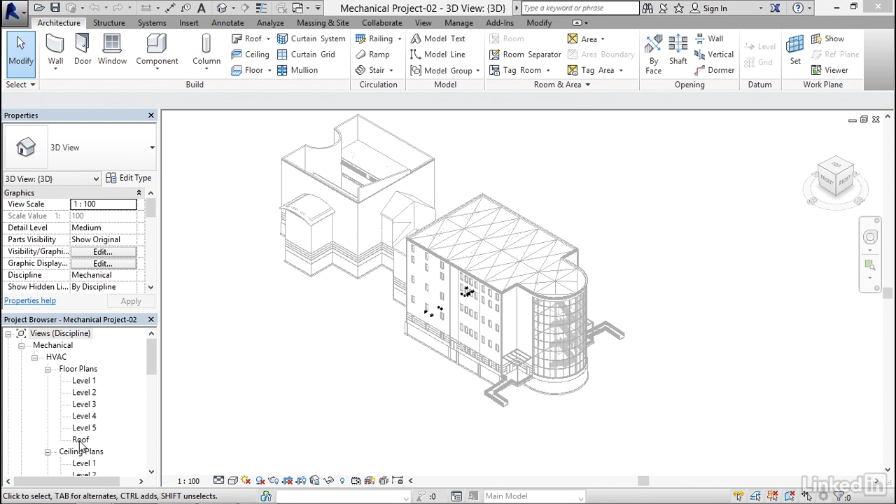of my building. In my project browser, I'm going to go to my roof level. Now what I want to do is I'm going to zoom in over here. I think I want it over in this neighborhood. I'm going to go to Systems. I'm going to go to Mechanical Equipment. Now I know I don't have one of these big boys in here, so I'm going to click on Load Family.

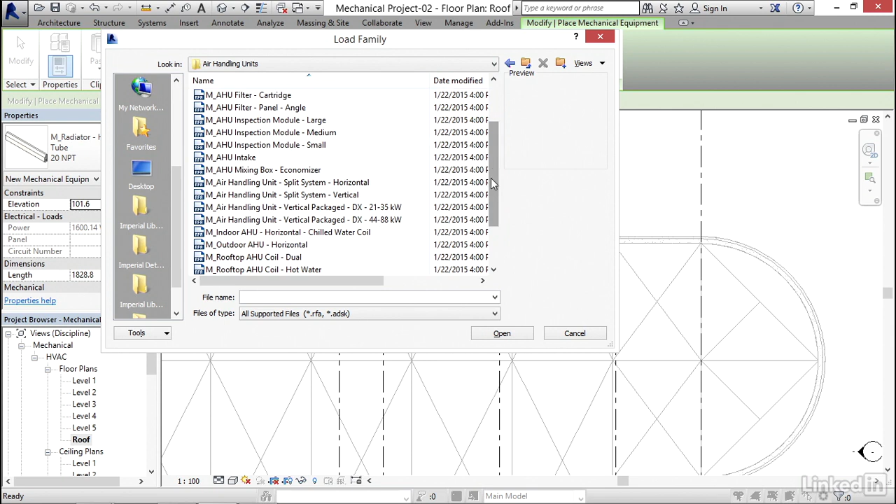I'm going to scroll down to Mechanical, MEP for sure. I want to go to Airside Components. I want to go to AHUs, Air Handling Units. And I want to scroll down till we get to M, Outdoor, AHU, Horizontal. That's my favorite. I want to click on Open.

Now I'm going to put it right about here. I'm going to hit Escape a few times. Now I'm going to select this unit. Generally, this will be up on some kind of curbing. What I'm going to do is I'm just going to give it an offset. I'm going to go around 305. Enter. 305 millimeters or 1 foot. I'm going to give it a little bit of an offset. Okay, we've got this in here.

Now I want to go down to my ceiling plan level 1. I like to hit my ceiling plan when I'm putting in my VAVs, just because I like to see where there's a hard ceiling or where there's a suspended ceiling. Generally, you want to put it somewhere where you can access it without having to cut a hole through some gypsum. So what I'm going to do is, now that I'm down here, I'm going to go to Mechanical Equipment.

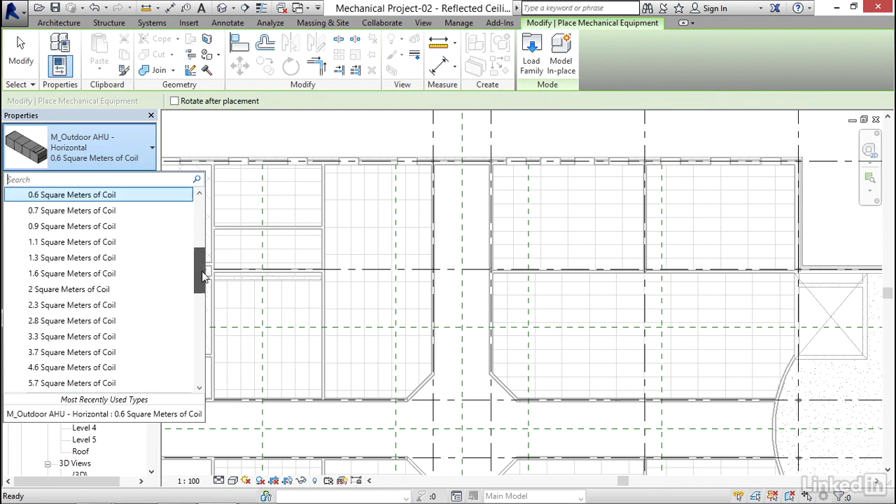I'm going to click my drop down here. And I know we've got a couple VAVs in here that I would use. So I'm going to scroll down and I'm going to grab my 300 millimeter inlet. Now my offset, I'm going to type 3048 and hit enter. Now I'm going to put that up in here somewhere. I'm going to hit my space bar.

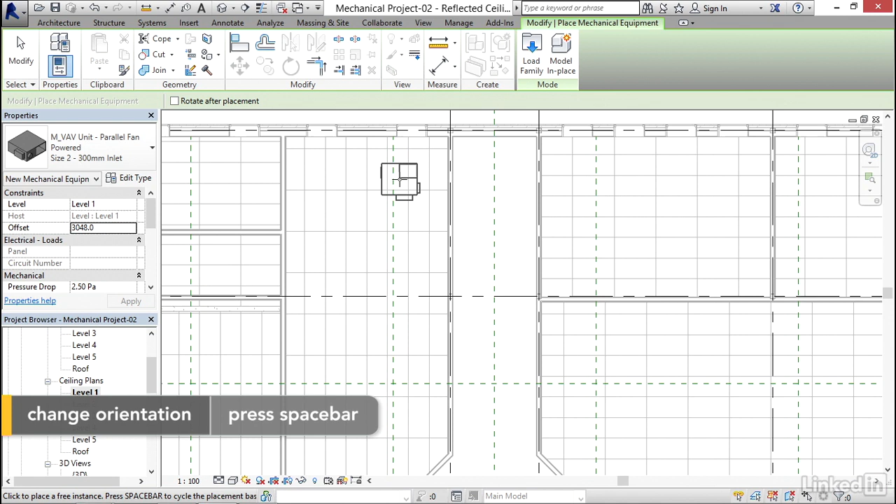Notice that I can rotate it. I'm going to rotate it into this orientation right here. Not that it really matters, but this is where I want it. So I'm going to put it right here. I'm going to hit Escape. I've got air coming in, got air coming out, and we've got Return. I'm going to hit Escape.

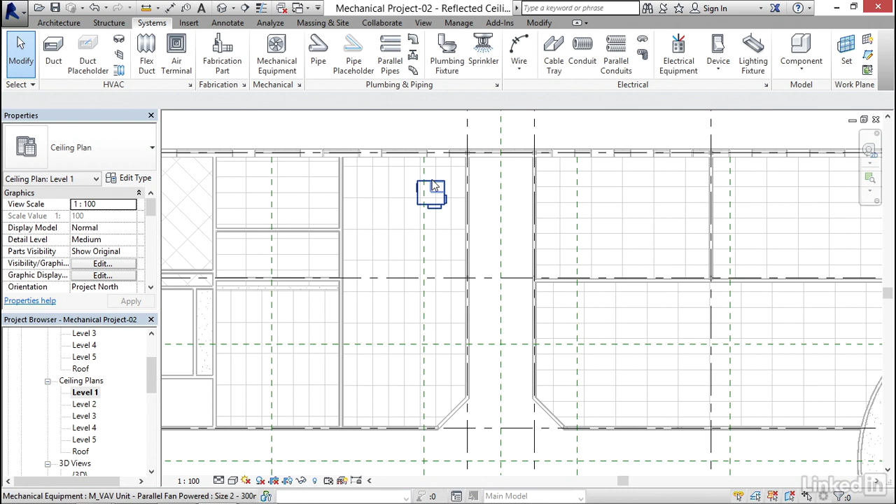I'm going to select it. I'm going to scroll down here. I'm just going to look at some of my parameters. I'm going to come down to Mark. Instead of 1, I'm going to call it VAV-1. I'm going to click Apply. I'm going to select VAV-1. I'm going to click Copy. I'll make 1 copy for now.

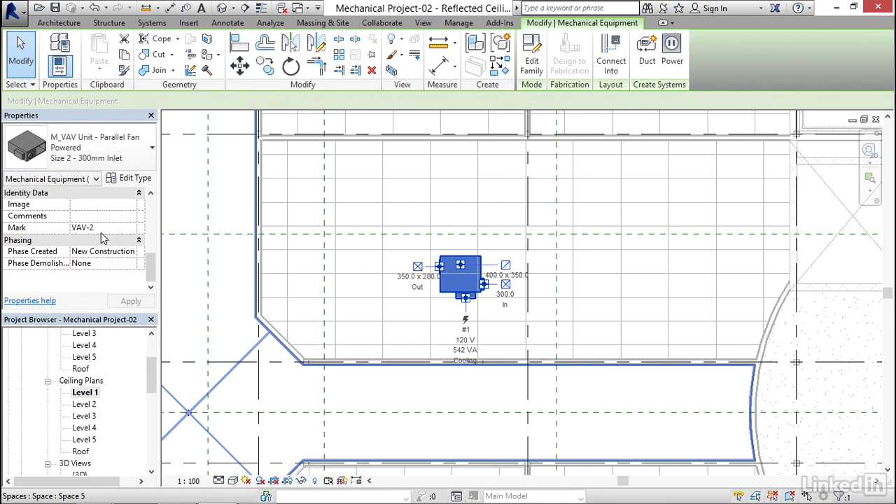So I'm just going to pick an endpoint down here. And maybe I want another system down here somewhere. So I'm going to pick a point here. But notice the mark, VAV-2. Pretty cool. This is going to come in handy when we start tagging stuff. I'm going to hit Escape a few times.

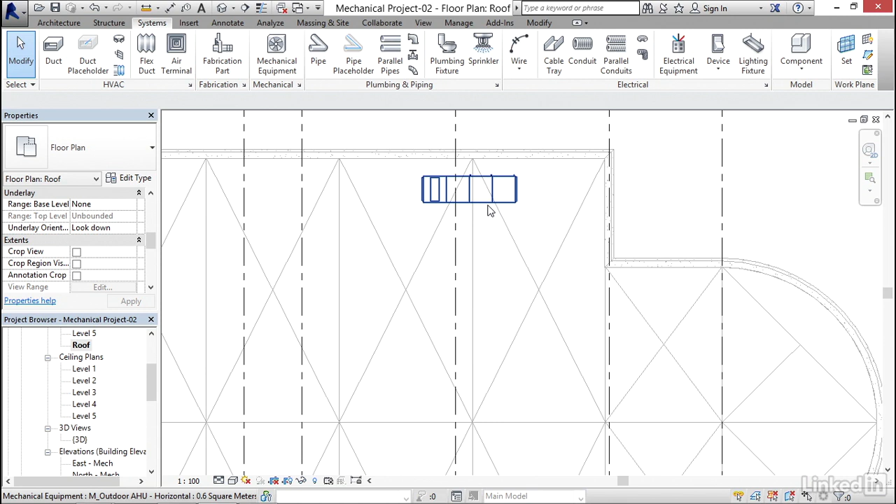I'm going to go back up to my roof level. But make sure you're going to your roof level floor plan, not roof level ceiling plan. As a matter of fact, I'm going to right click on roof ceiling and I'm going to click Delete. We don't need that anymore. So I'm going to double click on roof. I'm going to select my AHU. My mark is going to be AHU-1. Now I'm going to click Apply. I'm going to hit Escape a few times.

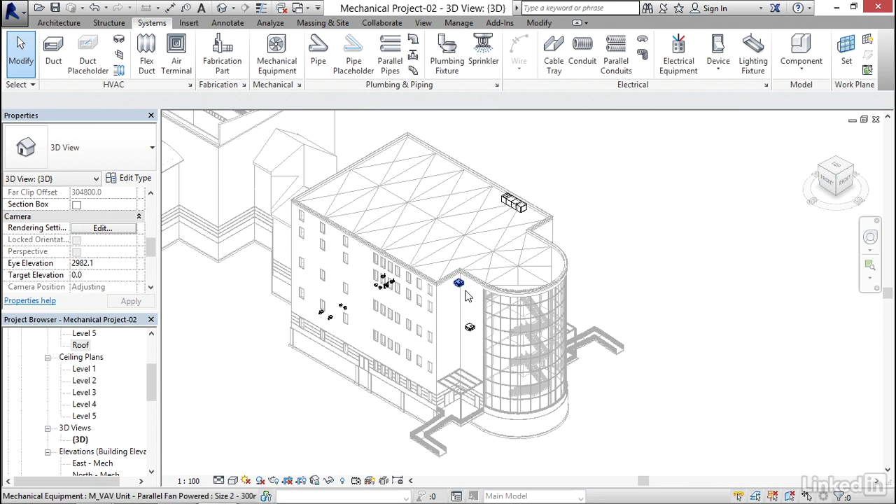I'm going to go to a 3D view. And it's not much, but we've got a good start. Know that we can copy these VAVs around anywhere we want. As a matter of fact, I'm going to go back down to Level 1 Floor Plan. Now I'm going to go to my section marker, and I'm going to click a section. I'm going to cut my section right through here.

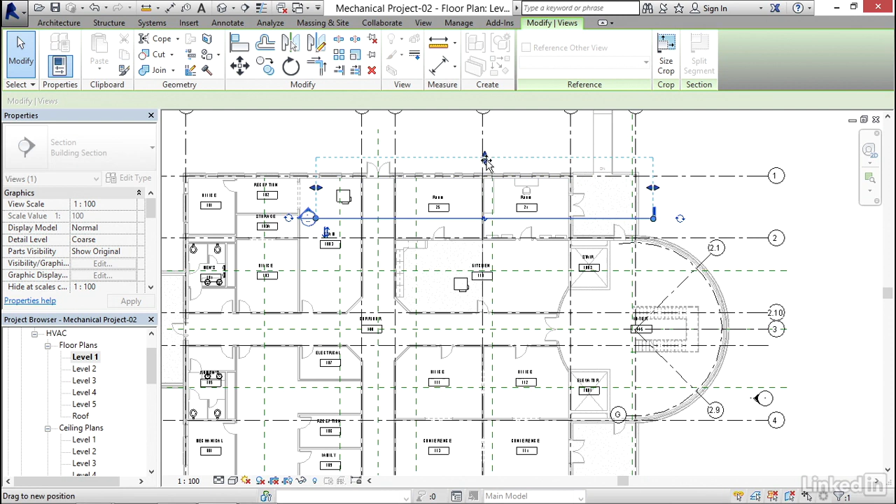I'm going to move my extents up into here a little bit. I'm going to double click on my section marker. Now think about it. If we want to run some duct right down this building and then connect into it, this section marker is exactly how we're going to do that.